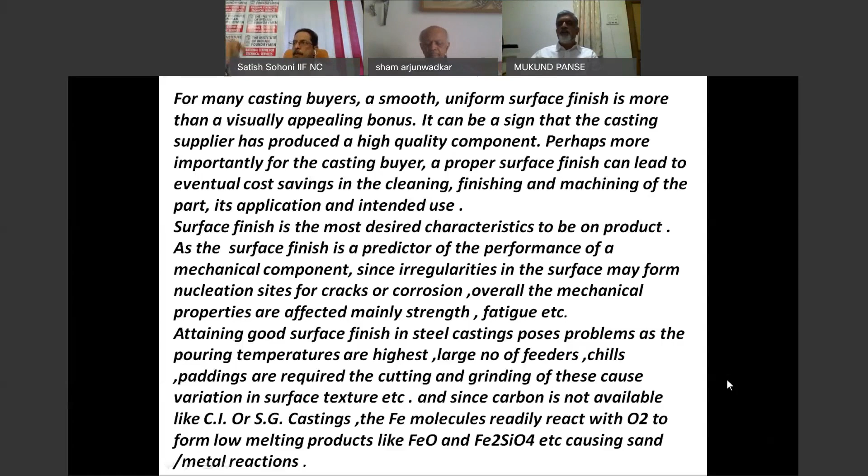It is the most desired characteristic and a predictor of performance - the minor unevenness or surface finish characteristics. The irregularities act as nucleation sites and affect the mechanical properties, especially strength, fatigue, etc. These irregularities also affect the corrosion properties of stainless steel castings.

Attaining good surface finish in steel casting poses problems as the pouring temperatures are very high, the metal is reactive, and since the yield is very low, a large number of feeders, chills, paddings are required, and in removing and finishing them, the original texture of the casting gets distorted.

Also, the typical phenomena of reaction with the mold is caused by the oxidation of the iron particles, which does not happen in CI or SG casting as the carbon content itself is very high, and also the carbon in the sand and painting helps - that's why you get a better finish in SG and CI casting compared to steel castings.

Nowadays, surface finish has become an integral part of the quality specifications. Customers will specify so much RMS value of the texture is required.

It also affects the performance. For example, in pumps and valves, if the inside portion is rough, the velocity of the fluids and the product will get affected. Also, mainly casting forms a small part of a total equipment, and the total equipment is of a different look. You cannot have a bad part in a total equipment which will get highlighted.

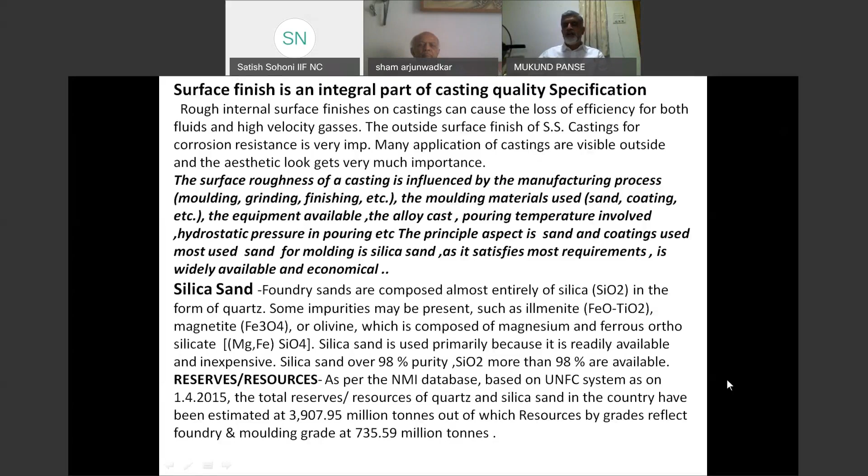And the Allahabad sand, which is on the banks of Ganges, is supposed to be one of the best sands in the world. As per NMI survey in 2015, the total silica sand reserves in the country are 4,000 million tons, out of which around 735 million tons is suitable for foundry use. So sufficient stock of silica sand is available.

Normally, surface finish specifications like ASTM A802 or MSS SP-55 for valves specify various characteristics like surface texture, non-metallic inclusion, gas porosity, fusion, expansion, inserts, metal cutting marks, grinding marks, etc. But we are going to consider this basic surface texture of a casting, as these other defects are things other factors can also contribute to.

For example, gas porosity can come because of the basic gas in the metal itself, gas generated by the molding material, gas picked up during pouring in the running system, etc. So we'll concentrate basically on the basic texture of the casting and how we should get a good texture.

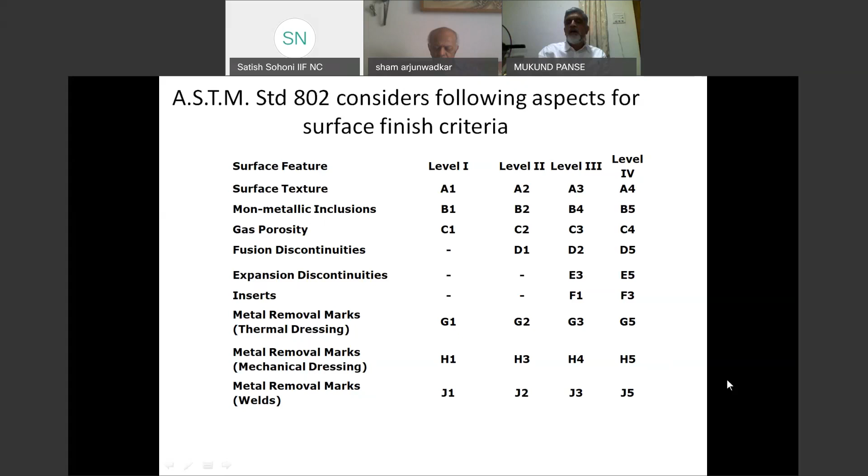The casting texture or surface finish is characterized and classified by RMS values, classified on a standard strata comparator from 20 to over 900. For best sand, that is shell molding or no-bake with very fine sand, you can try for around 150 to 200. For most castings, you will get around 400 to 500. You should try to see that you don't touch 900 or cross it.

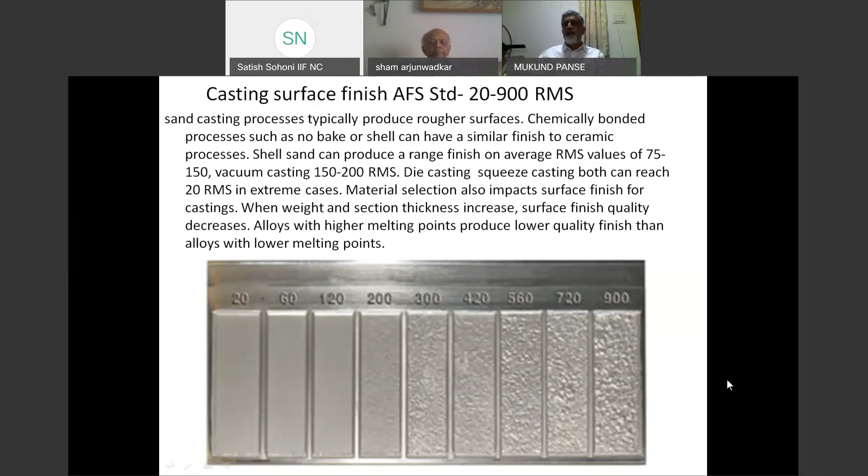The surface finish you get is mainly dependent on the fineness of the sand. The finer the sand, the better texture you will get. However, when pouring heavier castings, the fine sand will get fused and a sand-fused layer will form. So you have to use coarser sand, and the resulting texture, that is RMS value, will be on the higher side. So we'll see what are the basic requirements of sand grains for use as a molding material so that you get a better surface finish.

Naturally, the best characteristic is mechanical stability of the sand. Sand is mined, then transported, then mixed in a muller or mixer, then exerted to certain pressures in making a mold, that is ramming, jolting, squeezing or whatever method you use. Then metal is flowing on it, and then you are knocking out the sand. With all these mechanical forces applied, the basic sand grain should withstand these pressures and not disintegrate. Otherwise, more fines will be formed and the shape will be distorted every time.

The second most important property required is thermal stability. You are pouring steel castings at somewhere around 1500 degrees centigrade, so thermal stability is very important. It should not change its physical and mechanical characteristics when the metal is poured.

The third important characteristic is chemical reactivity. When pouring a metal into a certain type of mold, if the metal is alkaline and the sand is acidic, like pouring manganese steel in a silica lining, the reaction of the metal with the mold is likely to be more excessive and you are likely to get a bad surface. So you should consider the chemical reactivity of the basic sand, considering the temperature of the metal you are pouring and the type of metal, its chemical composition.

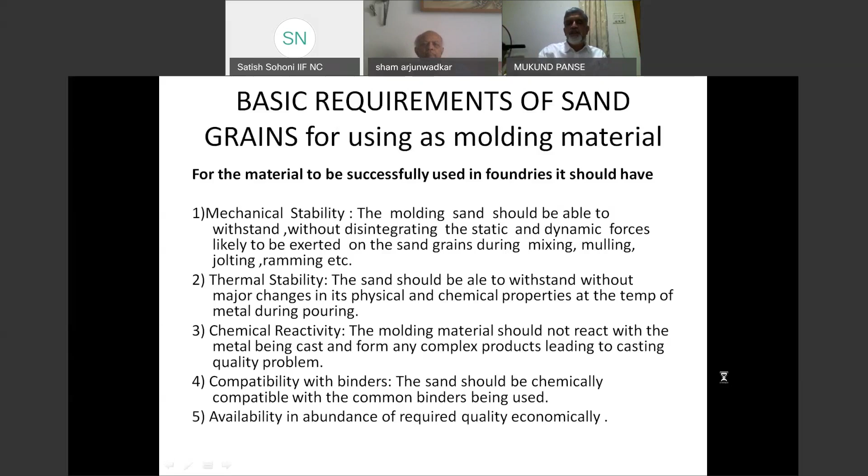So what are the basic characteristics which influence casting quality? It is refractoriness of the sand, that is its fusion point, the temperature it can resist. Linear expansion, the sand grain will expand when the metal is poured, and this expansion of sand can cause certain sand defects of the casting, which we will discuss shortly. The grain size, shape and distribution will decide the texture of the mold and what will be replicated on the casting surface.

The AFS clay content of the sand should be as low as possible. The clay will consume binder but will not contribute to the strength. Also, with more clay content, the sand will be more compact and expansion characteristics will be hampered. And lastly, the acid demand value, which affects use of certain resin binders. So the acid demand value should be checked when certain resins are to be used.

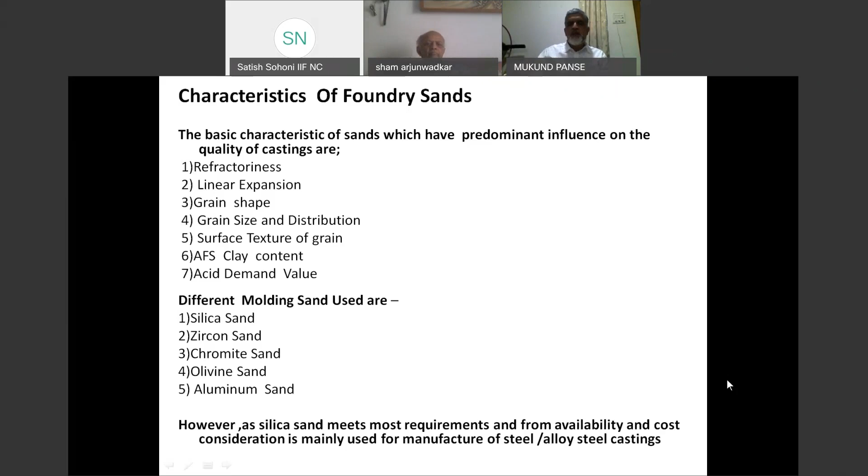The basic major molding materials or molding sands used are silica sand, zircon, chromite, olivine, and alumina. We will see one by one what are the characteristics of all these sands. We just discussed the expansion characteristics. The silica sands satisfy most of the characteristics fairly, except its expansion characteristics.

You have rammed the mold, so the sand grains are compacted. If the individual grain starts expanding, there is no space for the grain to expand. Then what happens is the sand buckles, it cracks. When it buckles and a crack is formed, metal inserts into it and you get a scab. The same cracks, when formed in corners, heavier sections, or inside the core, you get rat tail or veining defects.

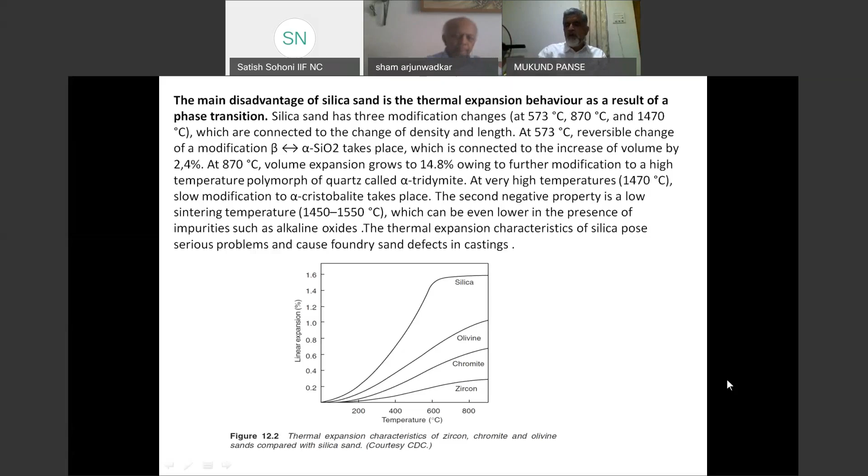These are the defects caused by expansion of the sand, and this is where silica sand is inferior to all other sands. Next sand used is zircon sand.

It is zirconium silicate. It is excellent sand and meets all the requirements. It is neutral, doesn't react with most metals. It has excellent thermal properties, very high fusion point, very low thermal expansion. The sand grains are round in nature. Unfortunately, the cost is very high.

This is a byproduct of heavy metal production, that is atomic energy applications, and hence its application is being steadily discouraged for foundry use. Now it is mainly used only in paints or in some proportion to some very high alloy and intricate investment casting slurries.

However, with zircon sand full molds, it is difficult to make castings because the metal gets chilled and you get a lot of cold shuts. So zircon sand was, or is, being used only for chilling purposes, so that sand doesn't fuse in heavy sections of a steel casting.

Advantage of zircon sand is you can mix it with silica sand, 50% zircon, 50% silica, something like that, to get the effect of both sands. You can reduce the consumption and get some effect of neutral chemical reaction. But again, this use is restricted to heavier junctions only.

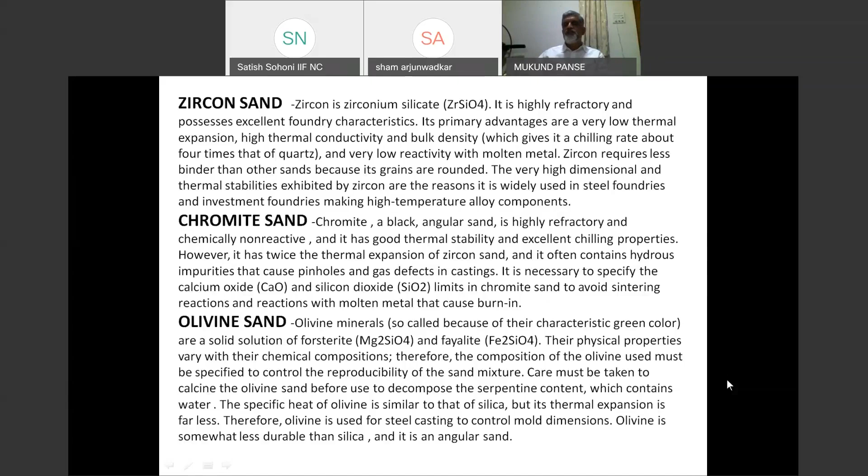Chromite sand is a black angular sand. It is highly refractory, chemically non-reactive, with good thermal stability. Its thermal expansion, though more than zircon, is substantially less. Its chilling properties are very excellent.

But the problem is this is a mined sand, a crushed sand. So you get angular grains, and getting the exact distribution required is difficult.

This chromite sand is again used at heavier metal junctions so that the metal doesn't fuse. You have to control the SiO2 and CaO percentage in this, because when the free SiO2 is more, it can react with chromite and iron when the metal is poured, forming a solid, hard fused mass.

The next sand is olivine sand. This is also a mined sand. It is green in color, hence called olivine. It's magnesium and iron silicate. The physical, mechanical, and chemical characteristics slightly vary depending on the proportions of this. Unfortunately, it is difficult to get exact proportions and exact distribution of sand.

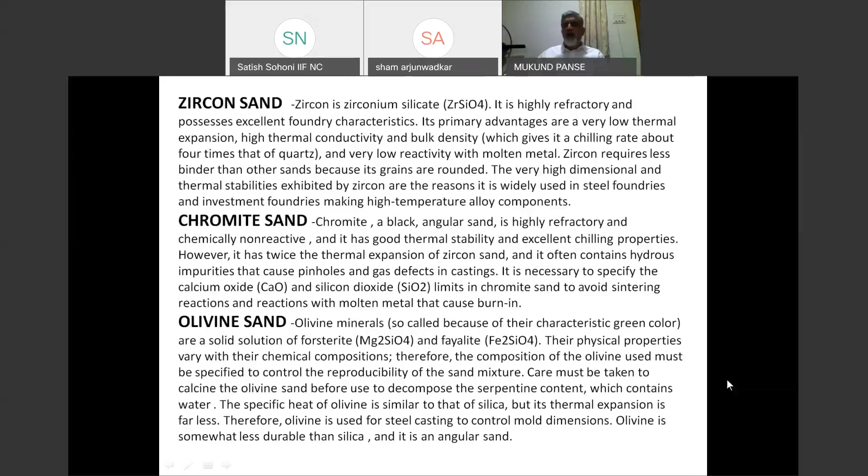It is used mainly for making manganese steel castings, because manganese doesn't react with this Mg and you get a much better surface. However, you have to use it after calcination of this sand, because there is serpentine in this sand, and serpentine, being hygroscopic, absorbs moisture and you can get blowholes in the casting.

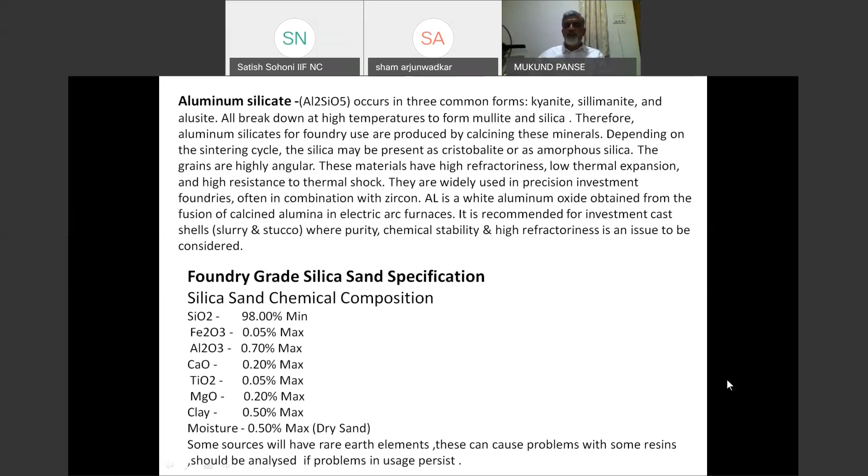The specific chemical specification of silica sand is 98% purity, and mostly you get this purity. However, you should control the TiO2, CaO in this, and also the clay percent and moisture.

This is the specification of chromite sand. The chromite content is around 45 to 50%. Iron is very high. You have to control the SiO2 percent. The specification mentions less than 1%, which is difficult to get. But if it goes more than 3 to 4%, you will probably end up with problems.

So you should check that, and also check the distribution, as you may not get the exact distribution you want. This is mostly imported sand, but still used in heavier sections in steel casting for chilling where fusion of sand is expected. However, if this is used in high proportion and reclaimed sand is used for facing, this can create issues again of reaction between chromite and silica.

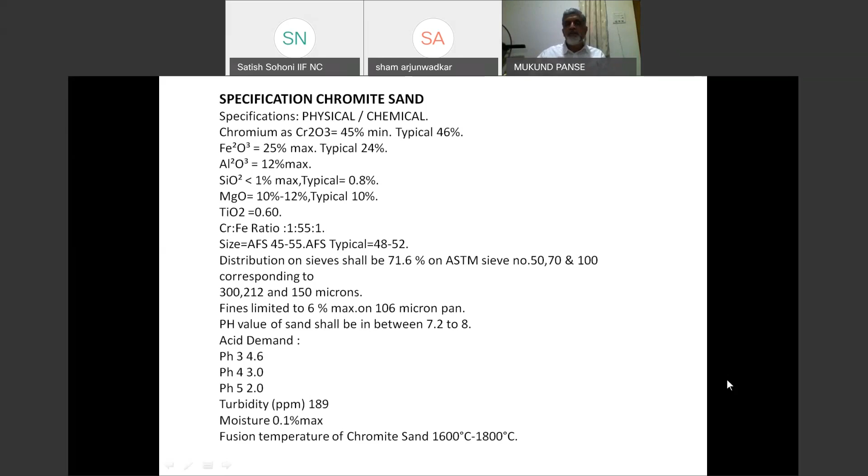This is a photograph of chromite sand used and fused at a heavier junction because of reaction with silica and iron. This is called double skin defect or elephant skin defect, and it can then be removed only by chipping. Even by grinding it is difficult because it is a hard refractory mass and doesn't get ground. Fettling becomes a major issue if this sand layer is formed.

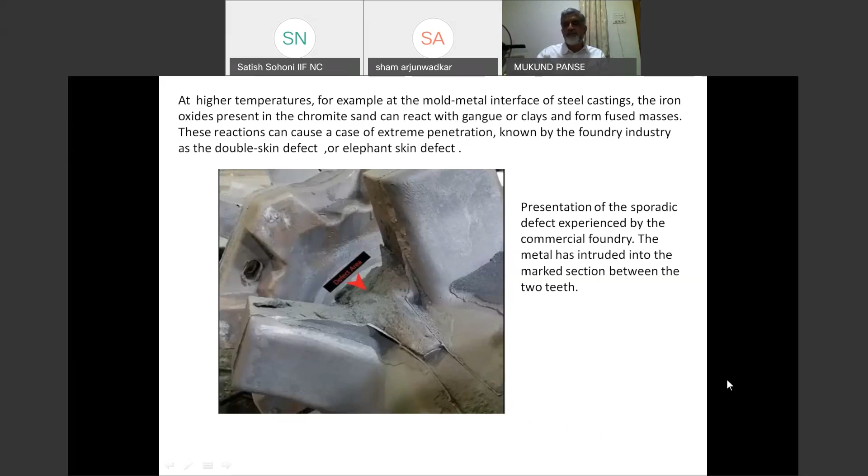Another use of olivine sand is in Hadfield steel.

You should check the chemical composition, and if FeO content and CaO content are higher, you should check on it. MgO content as given in the specification is 50%. You should try and see that it is more than 50%.

It has high alkali content and it doesn't go well with certain resins. You have to choose the resin sand mixture carefully if you are using it properly.

It is only used mainly in manganese steel because silica sand grains react with manganese steel and you get a very bad surface. The grains of this are angular.

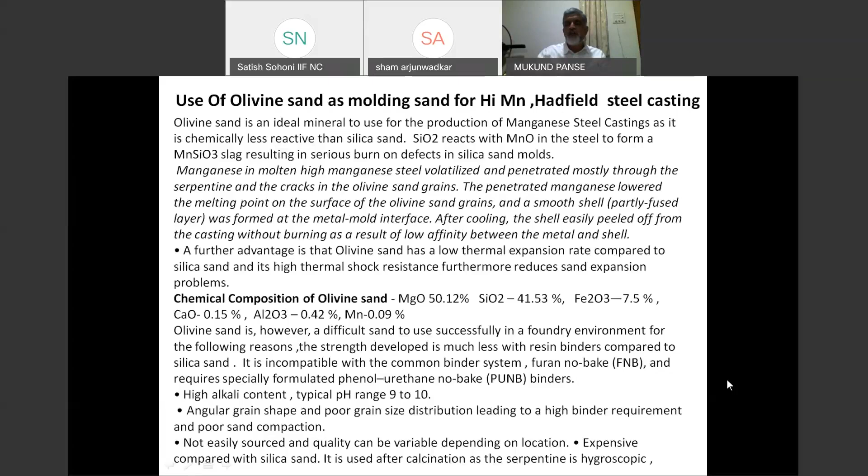It is expensive and not available at all locations in India. The transportation cost adds to it. This is also used after calcination, as you want to remove the serpentine portion, which is hygroscopic.

This is comparative of molding sands. AFS grain size is normally what you get. With silica, you can get whatever grain size distribution AFS number you want.

Zircon you get much finer. Chromite and olivine also, but with chromite and olivine it is difficult to get the 3 or 4 sieve distribution which you normally seek to have proper compaction of the sand grains.

The thermal expansion of silica sand is more than 4 times that of zircon, and 3 times that of chromite, and again the silica sand expansion is non-linear.

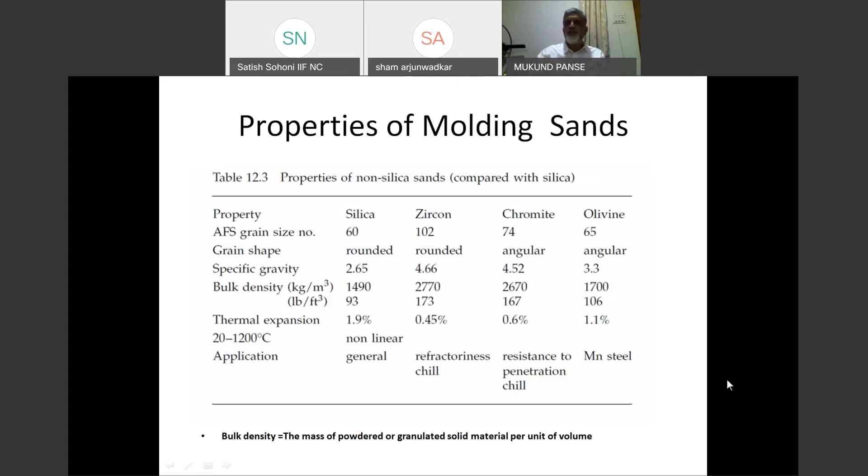The refractoriness is also less, but around 1400-1500, with application of paint, silica satisfies most of the requirements of sand and can be used effectively.

The basic grain structure shape contributes a lot to the properties of molding sand. You seek a rounded grain, so the binder required is less, because the surface to volume ratio of a sphere is less compared to all other shapes.

However, it is difficult to get exact spherical grains. In practice, what you can get is subangular, rounded, and of medium sphericity.

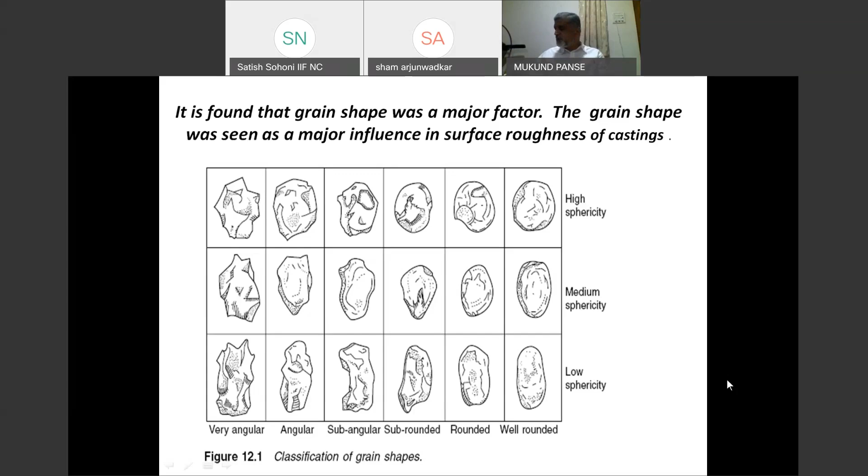As the sand surface area increases, I mean if you don't have rounded grains, the bonding material required increases. The rounded grains also have better flowability and better permeability.

The porosity of the mold controls the permeability. When the grains are compacted, rounded grains will leave certain voids, provided you have proper distribution of sand.

You try and procure sand with 3 or 4 sieve distribution at 80%, so that there are not too many fines, and the gap between the two grains is not filled by the fines. This way you get good permeability.

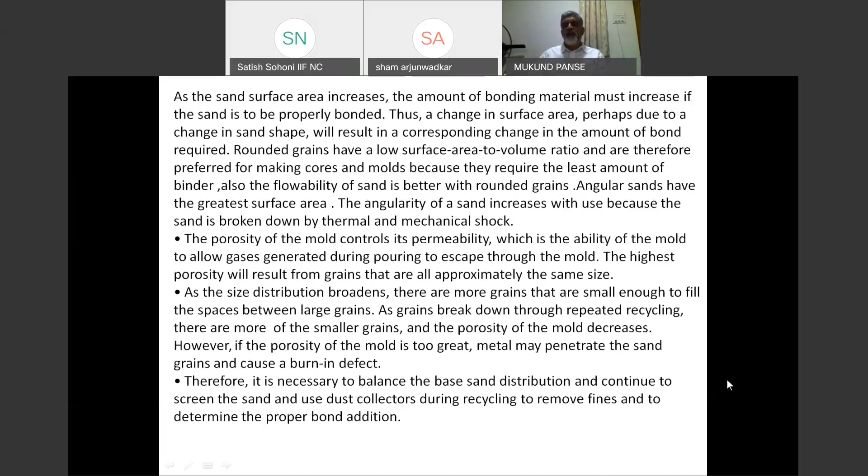This size distribution is designated by AFS number, which is a weighted average of different grains, and the specification of sand you can have, say you want 50, 60 AFS, or 70 AFS which is much finer, or 45 AFS which is coarser.

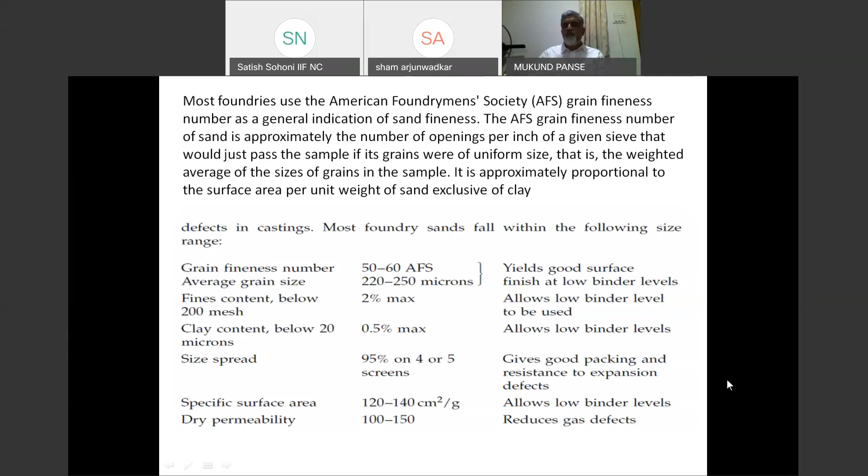The clay content or fines are normally quoted as 0.5 or 1%, which you get in washed sands, and the spread you mentioned, 3 sieve distribution, is 70 to 80%. From the sand grains you make a sand mixture with which you make a mold.

The grains are mixed with ingredients, binders, so that they can be bound together when rammed, compacted or heated, and the formed mold should retain its shape. From a general viewpoint, the sand should be readily moldable and should not produce defective castings if used properly.

Certain specific properties have been identified: green, dry, hot compression and retained strength of a sand mixture. Green strength is the strength of a mixture in the green stage, and this is applicable mainly to green sand.

Dry strength is the strength after the mold has been dried. Hot compression strength is the hot strength of a mixture.

This is required to be high so that the sand doesn't get eroded when the metal is flowing through it, and it retains its shape.

Retained strength is the strength of the sand after the metal has been poured and while it is cooling. The retained strength should be as low as possible so that the casting cools and contracts without any hindrance, and you don't get hot tears and cracks.

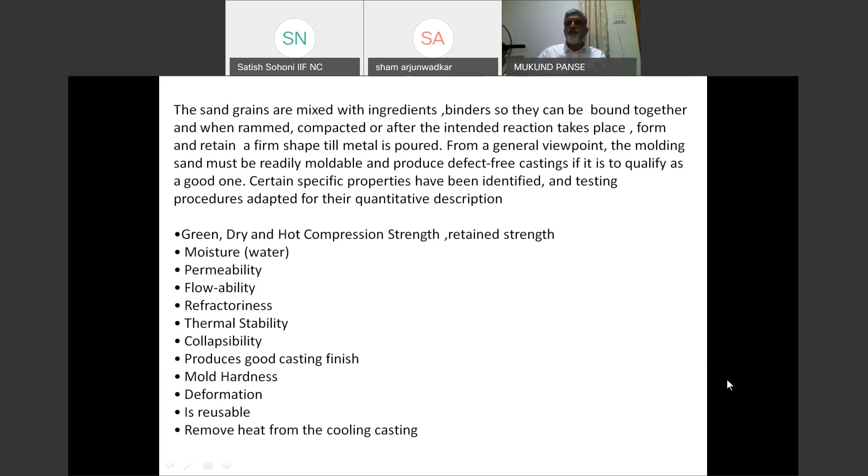So what are the different sand mixes we use? Green sand is the basic, age-old technique where bentonite clay is mixed with the sand along with some water.

The clay develops a layer on the grain. The grains, when rammed, are formed together and some strength is developed, though the strength is very low. This is a very fast process of molding. Since no gassing is required like the CO2 process, and there's no waiting for self-hardening, it is the cheapest process. It is most convenient for machine molding applications like jolting, squeezing, ramming, or Herman machines, sand slingers, or turntables, because it is very fast. You can ram the sand and the mold can be stripped. The mold is ready.

Dry sand was used earlier, in which the same sand, a small amount of core oil, fire clay, and iron oxide was used, but probably nobody is using it now because no-bake and CO2 sands have become quite common. But green sand has its own advantages. Its collapsibility is very good and it's still used by many foundries, especially where machine molding is used or for very small castings without very stringent requirements. It can be comfortably painted with spray painting, and you get a fairly good surface finish as well.

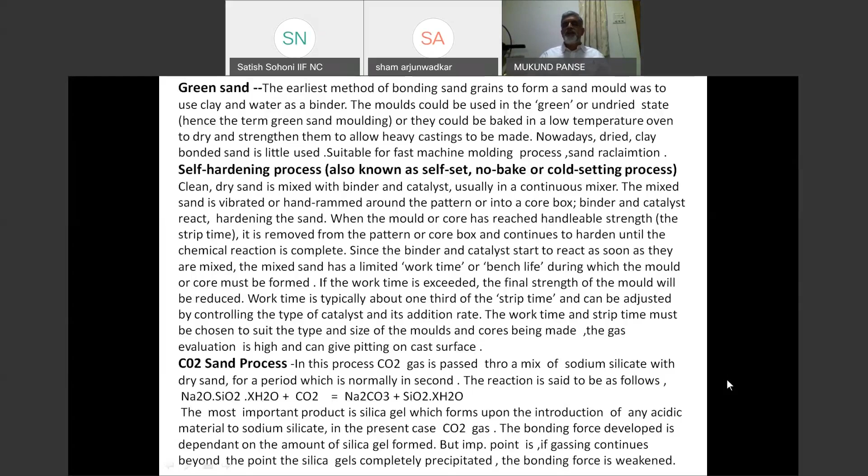However, reclamation of CO2 sand is very difficult. CO2 sand can be completely reclaimed only by a wet process, that is washing of the sand, which is now practically impossible given the quantity of water required.

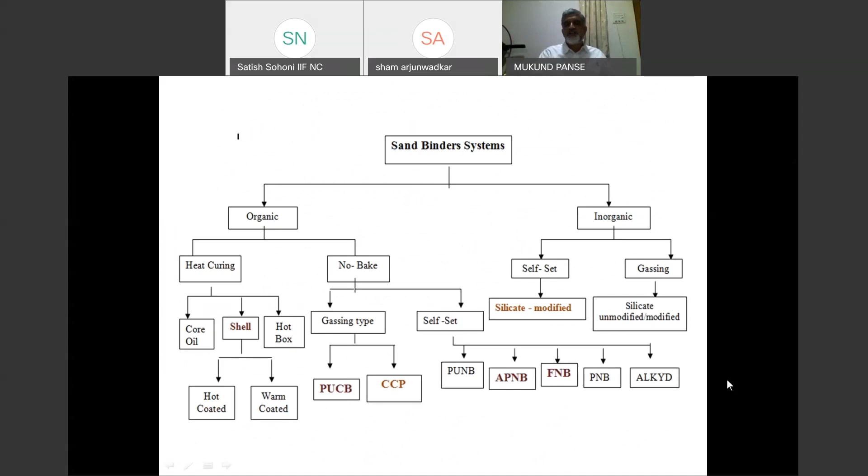For the surface finish, the basic problem starts when the metal is poured in the mold. What will happen in the normal course? Normally, when the metal is poured in, it should take the shape of the sand grains. So if the sand grains are very fine, you should get a fine texture. If the sand grains are coarse, you should get a slightly coarse texture, and it should stop there. But two things happen when the metal is poured in the mold.

When the metal is poured, with the hydrostatic pressure, or because of the high fluidity at these temperatures, it goes into the pores between the two sand grains. The sand grain between the metal gets fused because at that temperature it doesn't retain its thermal characteristics, and you get a fused layer of sand on the surface.

To avoid this, you try to have a coating of refractory material which will close the pores. The refractory material has substantially higher refractoriness, it is less reactive with the metal, and you get a better surface finish. This is the basic requirement of a coating: it should be a barrier between the metal and mold, with better thermal characteristics, high refractoriness, non-reactiveness, and very small size, so that you get a good surface finish.

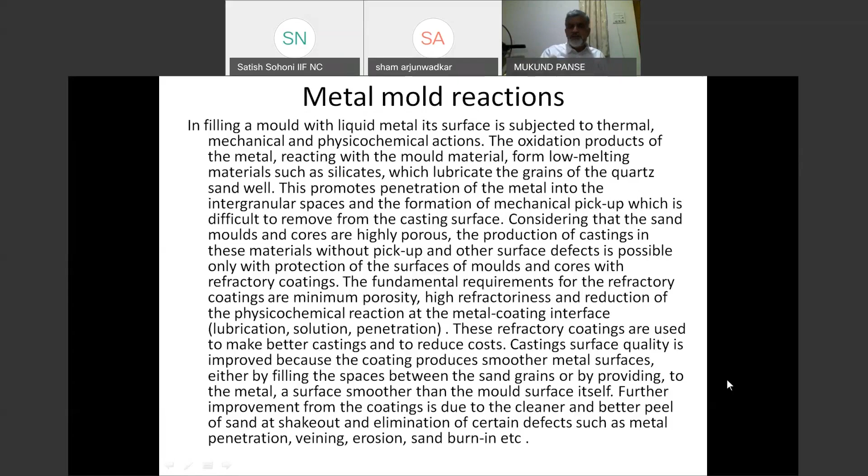Penetration happens mechanically, but there is also a chemical reaction which takes place, which is more dangerous, and this is the major cause of bad surface finish in steel casting. When the steel is poured in a mold, in the process it gets oxidized and FeO is formed.

You have deoxidized and taken all the care, but when the metal is poured into the ladle, it gets exposed to the air. Again, when it is transported and poured in the mold, it is again exposed to the air, and FeO is formed. This FeO has a much lower melting point, and at the melting temperature of the metal, its fluidity is very high. So it starts reacting with the silica and forms Fe2SiO4, which again has a very low melting point.

This doesn't happen in cast iron because the carbon in cast iron itself is high. The FeO basically doesn't get formed.

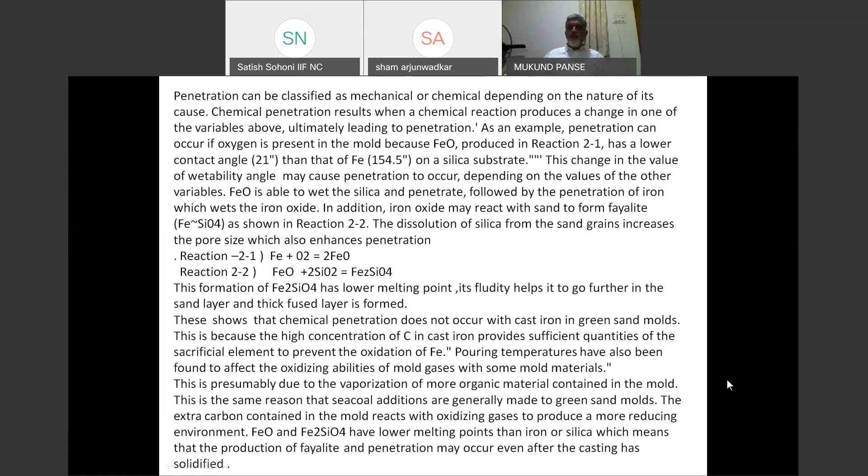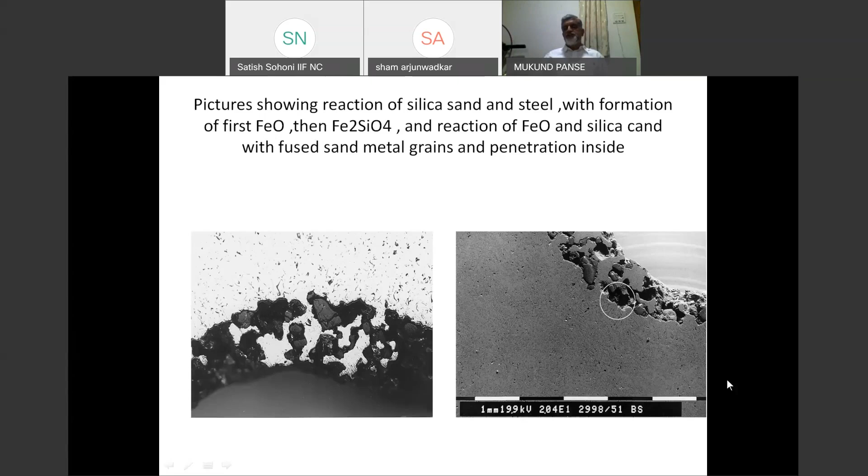Now, when FeO comes in contact with the sand layer, it starts reacting. It first goes between the two sand grains because its fluidity is good. Apart from its fluidity, it reacts with the sand grain and forms Fe2SiO4. These reaction products still have much lower melting point, and at this temperature their fluidity is substantially high. The penetration rate is very high, and you get a very thick fused layer of sand.

This penetration causes the wettability, that is the ability of the metal, since FeO and Fe2SiO4 form, to be substantially higher. Let's see what wettability is.

If you drop water on glass and drop oil on glass, you can see the contact made by oil versus the contact made by water. Compare it with a steel ball kept on glass - the steel ball will have minimum contact, oil will have more than that, and water will have much more. Now imagine a drop of water on chalk or sand - it will get spread immediately. This is what wettability is, and it relates to the surface tension of a liquid when it comes in contact with a solid layer.

The wettability angle, theta, is defined, and this wettability angle for FeO is much less - it is 21 degrees - while the wettability angle of iron is substantially more.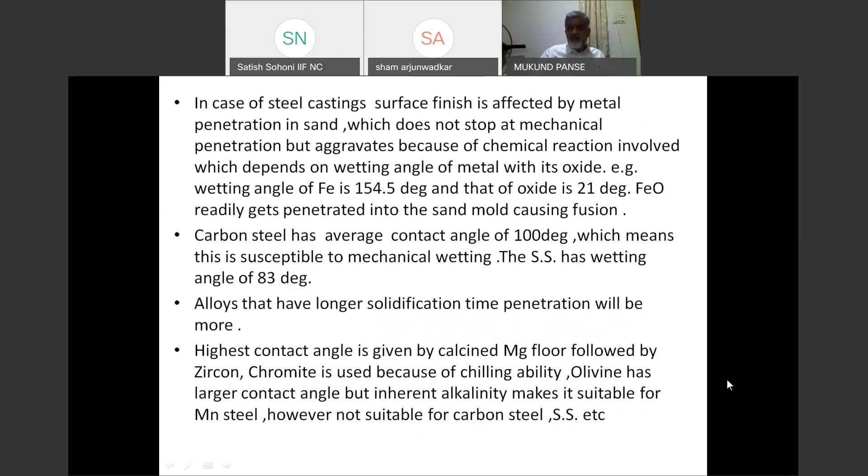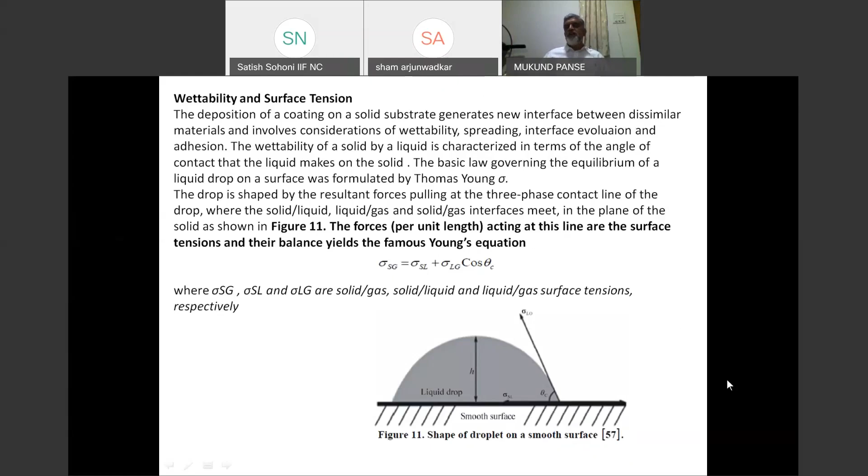This is the reason you have to choose a proper layer of refractory, so that the iron oxide doesn't form easily, doesn't spread very easily, and the reaction doesn't proceed very fast. These reactions, and whether it behaves like water or oil in terms of theta angle, are all dependent on the basic characteristics of the chemical reaction between metal and mold. This chemical reaction is basically responsible for completely wetting the mold sand grains with the oxides, which causes sand fusion.

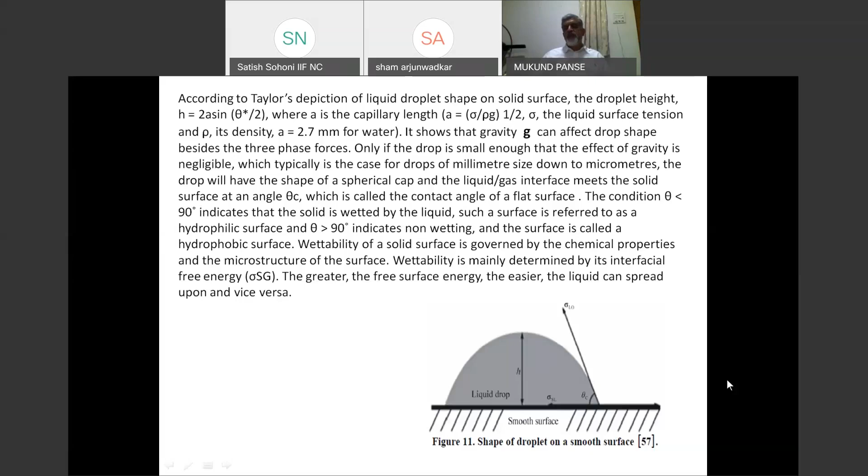At the same time, when coating is to be applied on the mold, we want the wetting angle of the coating to be excessively low so that the spread of the coating is very good. The importance of foundry coating in improving surface quality cannot be overemphasized. It depends basically on the characteristics of the paint, and one has to choose the proper coating material. So what are the important characteristics of the coating material? We'll see.

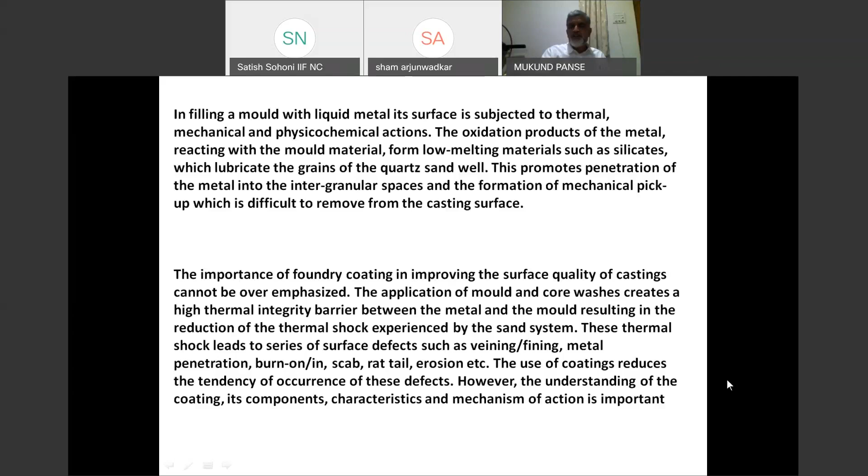A refractory coating should have a high fusion point. We are trying to give a coating of refractory fines on the mold surface, but dry refractory cannot be coated, so it has to be carried through some liquid so it can be sprayed or coated properly. Normally, the carriers are either water or alcohol, spirit based.

When you are trying to carry it and the refractory is coated, it should remain there and should not be friable and come out. So you need a binding agent to keep the grains bound together. Also, when applying the paint, the refractory should remain in suspension, so you need a suspension agent. So these are the four ingredients you need in a coating.

The coating should be correctly applied on a sand wall. The refractory material should have high fusion point, low expansion, be chemically inert to the metal, have sufficient refractory properties to cope with the metal being poured, and good adhesion to the substrate. The coating should get adhered, it should not spill out, spit, or form cracks or blisters.

It should dry fast. Blistering, cracking and scaling should not happen. The mixture should have good suspension. The core or mold strength should not degrade. The metal penetration should stop.

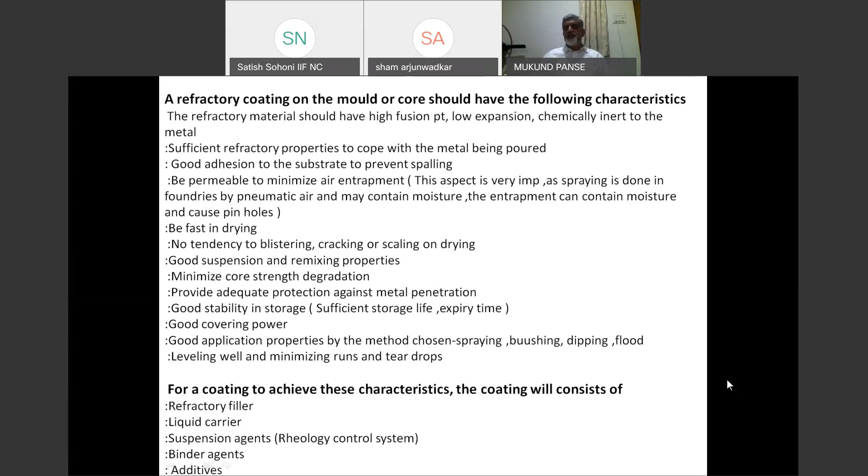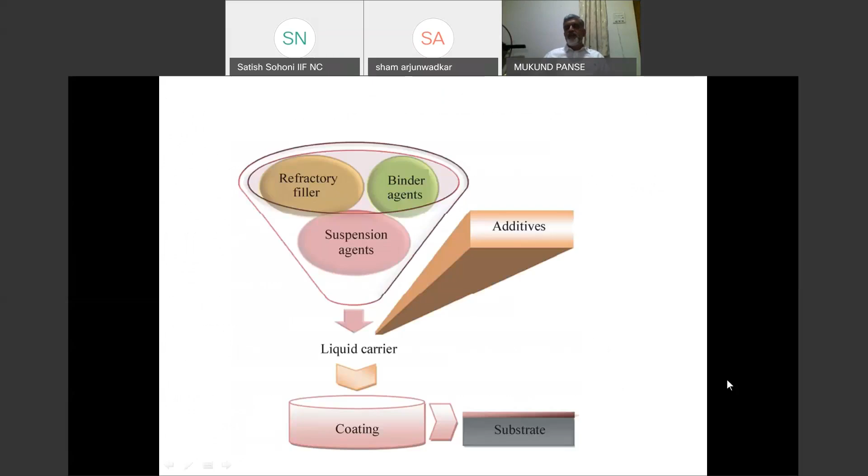For all these, the basic agents are, as discussed, refractory filler, liquid carrier, suspension agent, binding agent, and certain additional additives are required so that the spread of the metal, or scaling, cracking, blistering properties are adjusted. So basically, refractory filler, binder and suspension agent are added to the liquid carrier, and additives are added, and the coating is ready to be applied to the substrate, that is sand or core mold.

The refractory material is the base of a coating, which determines how efficient the coating is. Normally, in a refractory coating, the refractory particles constitute 50 to 70%. Its particle size, shape, density, sintering point, thermal properties, chemical properties, expansion characteristic, reactivity, etc. are all considered for deciding the exact appropriate coating for a proper application.

The application may depend on the metal you are pouring, the size of the casting, the surface finish requirement, etc. The different refractory materials used are plumbago, silica, graphite, coke, anthracite, zircon, magnesite, olivine, clays, chrome, alumina, mica, etc.

The refractory choice considers the type of metal poured, pouring temperature, and the thickness of the casting. The heavier casting will need better refractoriness because the sand is going to be heated for a longer time. Peel characteristic: the coat should not peel off, it should remain stuck on the sand or core. Thermal conductivity, expansion characteristics, application characteristics, toxicity.

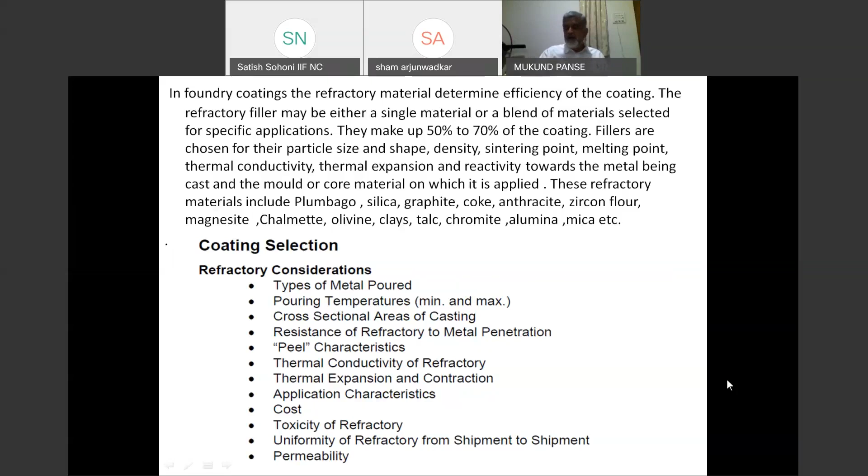While coating, sometimes there are bad odors or fumes coming from the alcohol, so a proper carrier should be chosen. It should get applied uniformly. In shipment, it should not settle down, its bench life should be good, and permeability of the coating should be considered.

We'll consider what are the different refractory materials normally used in steel casting. The best is zircon flour. It has the best of characteristics. As discussed, it has good refractoriness, excellent fusion point, very high conductivity, very low expansion. Everything good is there except cost naturally.

The zircon has 64% ZrO2 and 32-35% SiO2. You should check the content of TiO2, and the moisture in it should be controlled. Its specific gravity, pH values, fusion point, all are good. This is the best coating material available.

Now this is used in mixture with some other refractory materials.

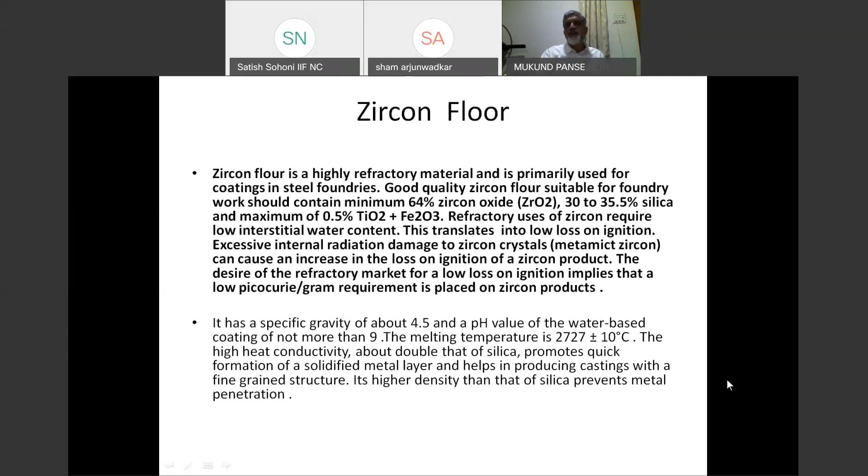Second is olivine. We have seen that olivine has low chemical reactivity with manganese steel, and this is mainly used for manganese steel and some other heavy applications.

Again, the chemical composition is to be checked properly. Its thermal expansion is slightly lower than silica, but it is not as good as zircon. Fusion point is high, 1800, more than silica but lower than zircon. But this paint is used for manganese steel.

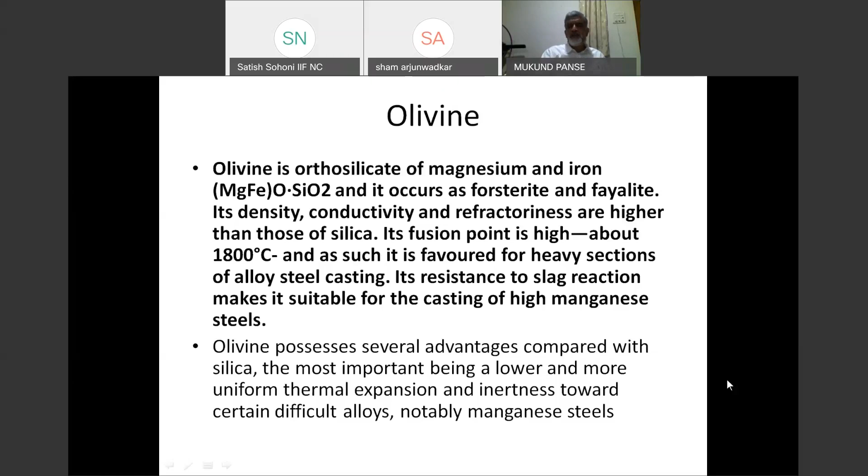This is the comparative data of refractory materials used for painting applications: chamotte, chromite, magnesite, chrome magnesite - availability, refractoriness. You will find that mostly magnesite and zircon only are used.

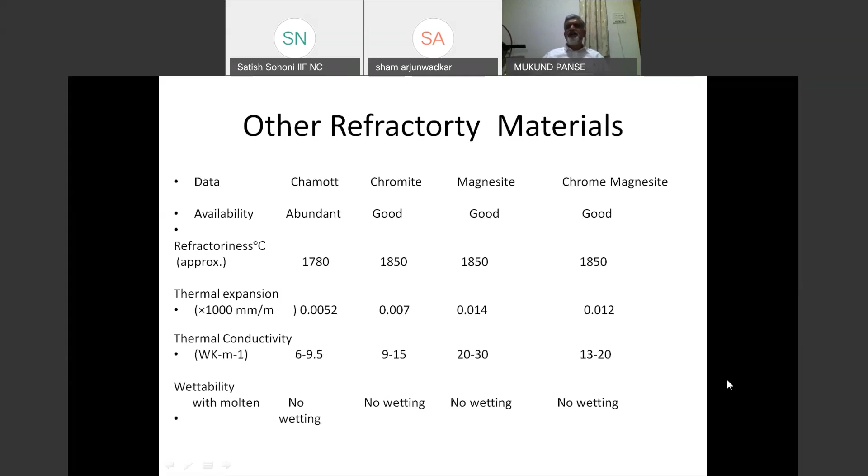The next ingredient of a coating is the carrier, that is either water or alcohol used. Water is non-inflammable, non-toxic, naturally cheapest, and use of water-based coatings is highly recommended, but naturally cannot be used on all types of sand. But whenever possible, you should try and use water-based coatings.

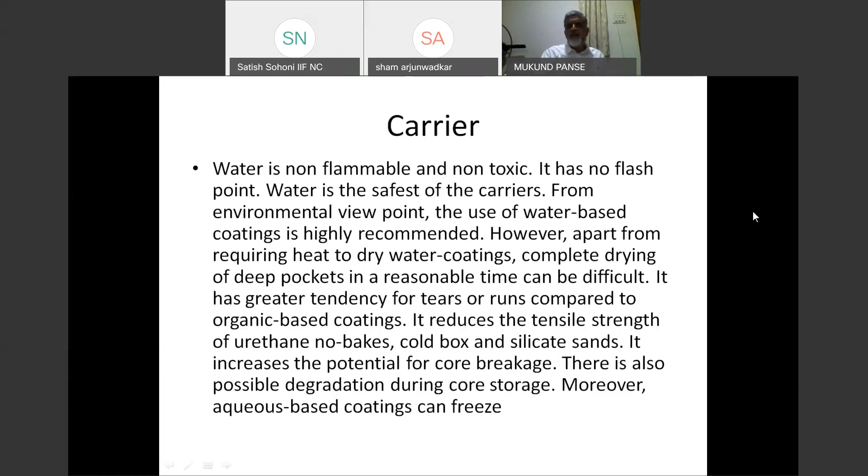The only disadvantage is naturally it cannot be used on all sand, and it has got more chance of dripping and runs forming. Also at very low temperatures, not experienced in most parts of India, but at sub-zero temperature, these coatings can freeze. Next is organic carriers.

These are mainly isopropanols, that is alcohol based. The coating has to be dried by igniting or heating. The typical organic solvent carriers also include methanol, ethanol, hydrocarbon, chlorinated hydrocarbon, etc. They dry very fast. Isopropanol is recommended for use on large molds and cores.

The basic requirement is when you are using an alcohol-based agent, it should burn with a slow heat. The heat generated should not be very high, so that the basic sand binders do not burn away. Also, if it is air dryable, it is better.

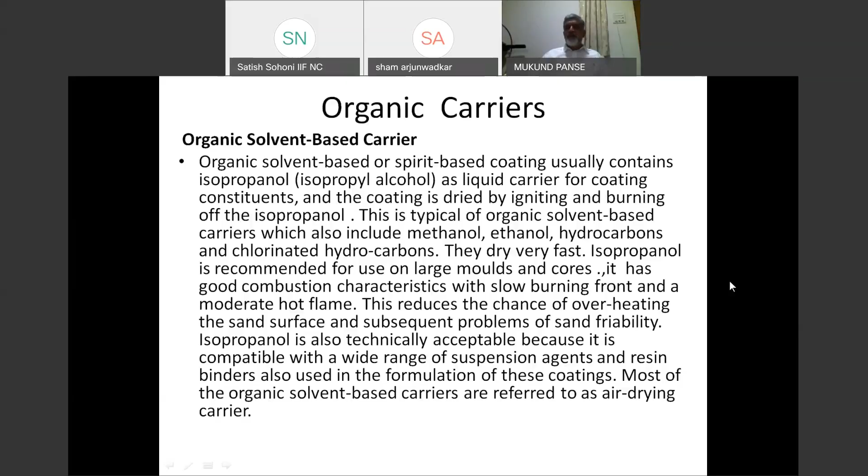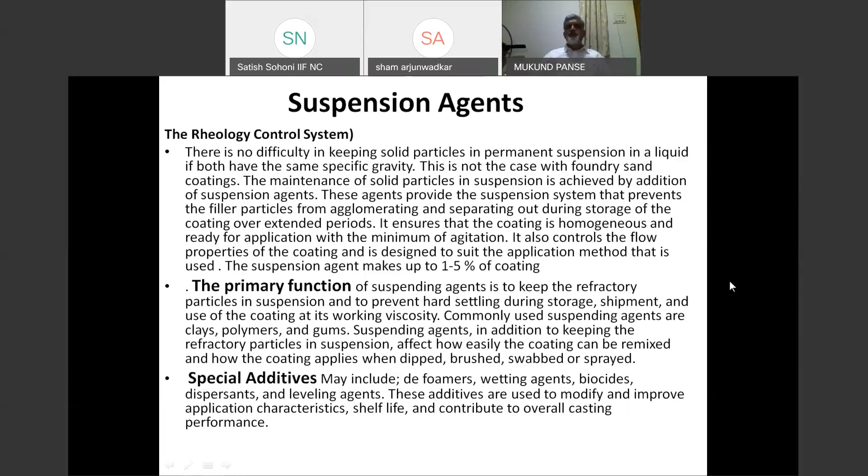Suspension agents: you are having a refractory which is a very heavy material carried in water or alcohol. So it is most likely that when you are trying to apply it, it will settle down, and the viscosity or Baume of the paint will not be constant. So to keep them in suspension all the time, suspension agents are required so that gravity doesn't try to settle the heavier particles.

The agent provides a suspension system so the filler particles avoid agglomerating and separating out during stationary storage of the coating over an extended period. They are required normally 1 to 5%. As we have said, 50 to 70% is refractory only, 1 to 5% is suspension agent, and the balance is mainly the carrier. The suspension agent should ensure that a homogeneous coat is available most of the time with minor stirring.

The primary function is it should not allow the coating to settle in storage, and should not form a hard layer at the bottom. That is, the shelf life of the paint when kept in a container should be fairly good. Otherwise, a very hard layer will be formed, and then it will not get mixed with the thinner or alcohol properly. Also, it should be possible to easily apply the coat by brushing, swabbing, or spraying.

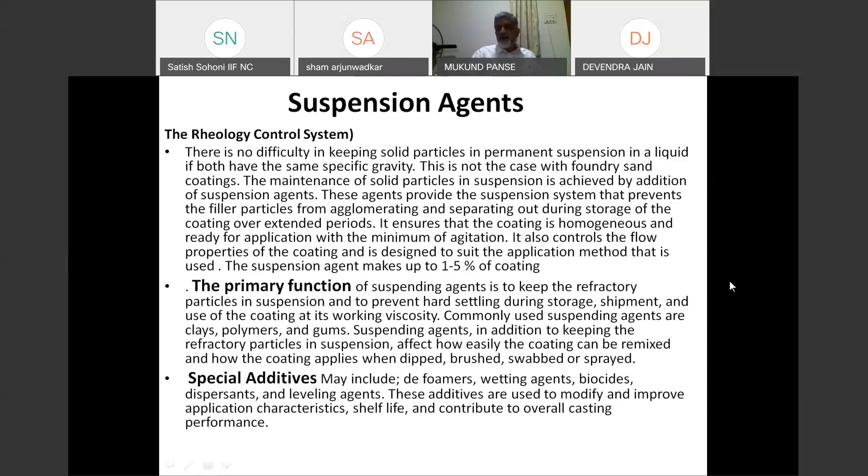Special additives may include defoamers, so that foaming should not occur, wetting agents, biocides, dispersants, and leveling agents. The application of the actual paint needs this wetting and leveling agent so that you get a uniform coat of the required thickness easily, all over the mold, to get a better finish of the casting.

The second ingredient is the binding agent. You are trying to coat the refractory on the mold. After coating through a carrier, it should remain there bonded together and should not come out, meaning it should not be friable such that it gets washed away with the metal.

For water suspension, the binding agents are sulfite lye, dextrin, bentonite, kaolin clays, or certain water-soluble resins. For spirit-based suspension, natural and synthetic resins, phenol, urea formaldehyde, novolac, and other wood resins are used. Binding agents act to hold refractory particles together and attach them to the sand surface.

The quantity of binder is again 1 to 5%. It is important to determine the minimum quantity of the agent required. If it is high, the coat will crack. If it is low, it will get washed away.

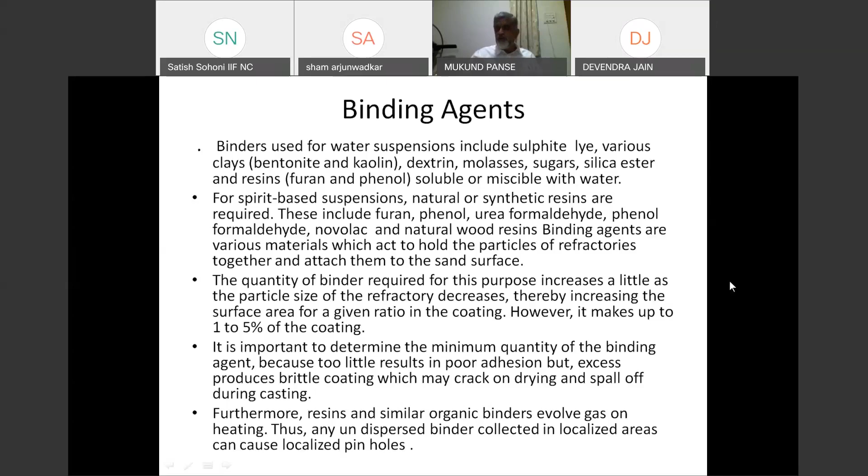So for the mold sand system you are using, you have to settle on a proper mold coating which gives a uniform coating. You may have to carry out certain trials with different paints, but settle on a paint which gives you an exact uniform coat all over the mold. Furthermore, the binder itself should not evolve much gas when heated, because they are resin based.

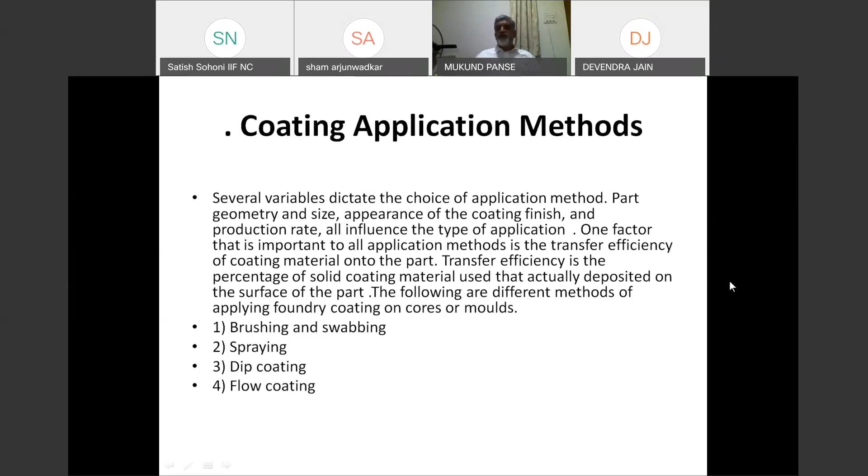Now the coating is to be applied on the mold, and there are various ways a coating can be applied: brushing or swabbing, spraying, dip coating, or flow coating. We'll see one by one what are the advantages and disadvantages of the different coating methods.

Brushing or swabbing is a method of applying coating used in foundries. You have to just brush the paint, ensuring it remains properly stirred with the refractory in suspension condition, because for a bigger mold to brush, it will take a lot of time.

The advantage is that force is applied while brushing. There is certain force applied, sufficient to force the small refractory particles to go into the pores between the sand grains.

The method gives uneven thickness, and stripes of brush or swab are visible on the casting surface, especially in walls and other castings where aesthetic values are important, and they don't allow these brush stripes or brush marks. So many times after one brush coating, you have to give a fine spray coating so that the brush marks are not seen.

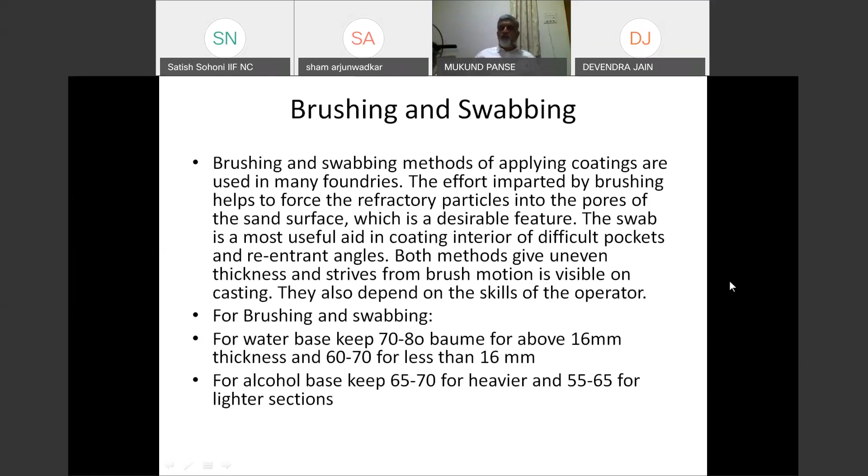You can use 70, 75, or up to 80 Baume for water base and 60, 70 Baume for alcohol base. This Baume can be changed for thicker or smaller castings depending on what surface finish is expected.

The next method of applying coating is spraying. Spraying is a much faster method of application used in foundries. The care you have to take is to get uniform air pressure so that the coat is uniform. You also need to ensure that the air is completely moisture free. The permeability of the coat should be good enough so that air entrapment does not occur.

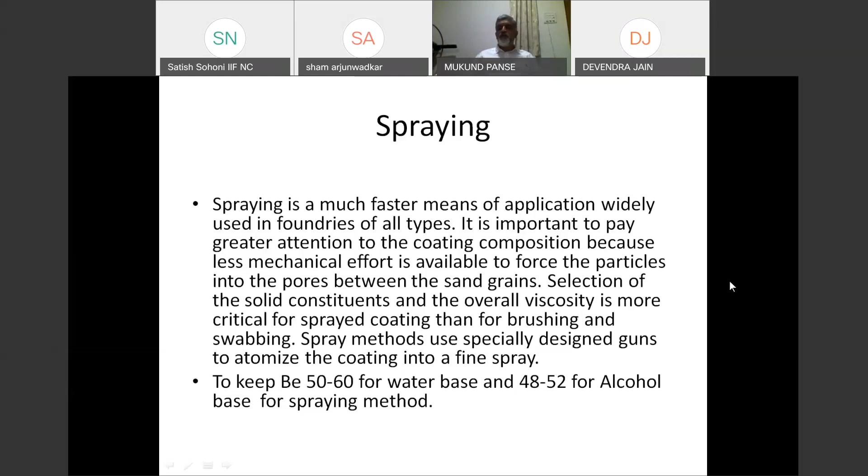The viscosity used for spraying is slightly lower than for brushing. For water-based paint it is around 50-60, slightly lower for alcohol-based. Spraying is problematic where intricate shapes are present; you have to use different angle spray guns for those portions, or brush those areas. The nozzle size through which paint is sprayed should be checked intermittently to get proper thickness of the coat.

Green sand molds are difficult to brush because the sand grain strength is not high, and while brushing the sand grains will loosen. Also it may not become uniform, so spraying is preferred. Water-based paint cannot probably be used on green sand because the moisture will increase, and it is very difficult to...

torch and burn off only the excessive moisture. Green sand should mostly use spray painting of alcohol-based paint, and that paint should be ignited, taking care that it doesn't accumulate at the bottom portion. If excessive paint is not there, it will not form gases, and there is good adhesion to the mold surface.

After spraying, the coating could get ignited or naturally dried. Natural drying is difficult because you will have to give a lot of time. You should ensure there is no peeling, cracking or blistering of the coating. You have to settle on whatever system of sand and coat you are using, trying different coats.

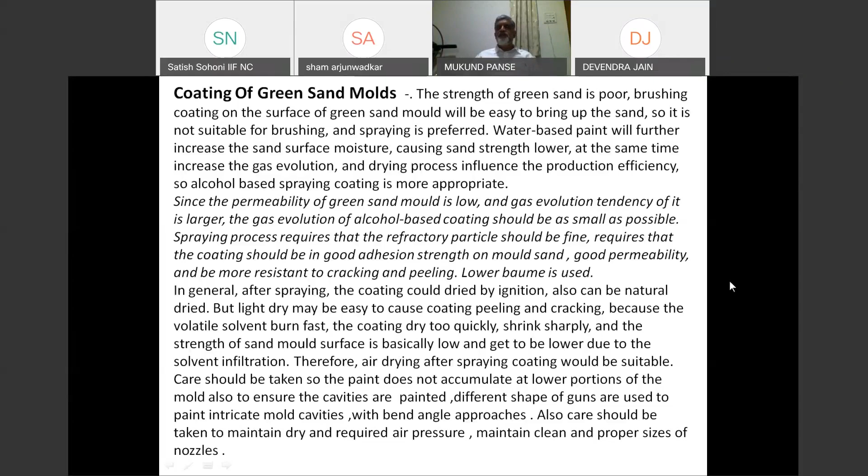Whichever basically gives you a uniform, good coating and good surface, you should continue to use that. There are many variables and you have to choose properly between them. The strength of the surface area in green sand or other molds is slightly improved after the coat is ignited and the hard layer is formed, and it should form in a reasonable time.

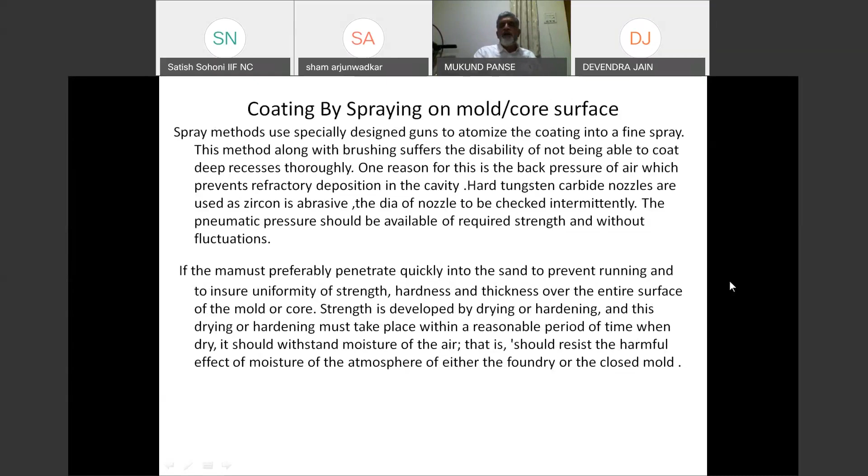The third process is dip coating, mainly used for cores, especially when the cores are small and large production runs are involved, so you can standardize the coating thickness. If you dip and withdraw it fast, there is insufficient time for the paint to drop back into the tank, and the thickness will be more.

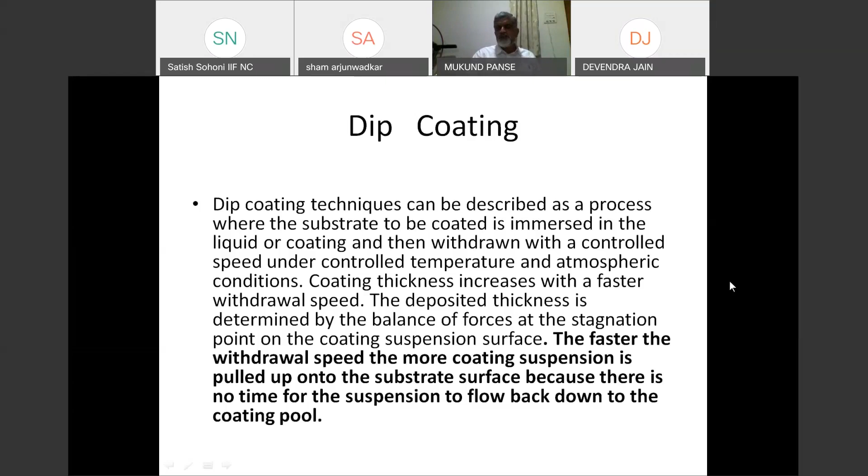At faster withdrawal speed, more coating suspension is pulled onto the substrate because there is no time for the suspension to flow back. You should standardize the timing; if it is completely mechanized, it is better. This can be done only where large runs of cores and molds are used.

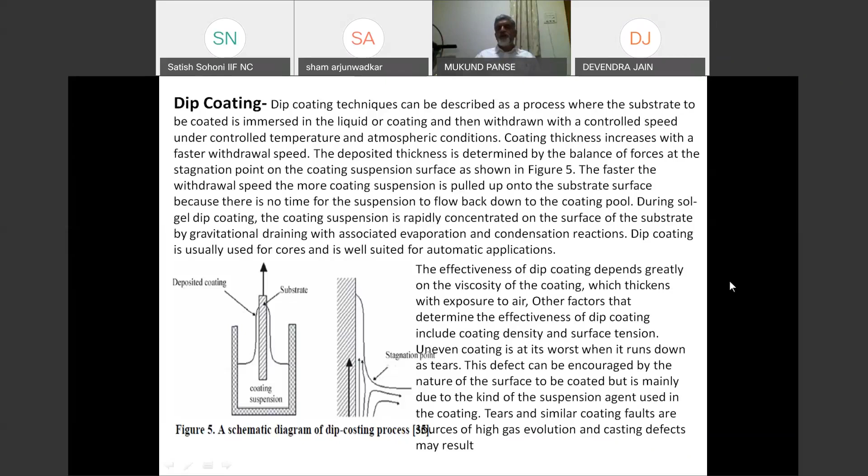You should also ensure the viscosity of the paint is maintained in the tank, and that fungus or other contamination does not form, because many times people just keep adding paint when the level drops. You should keep a proper place to keep the core after draining, and ensure there are no drippings or runs.

While dip coating, we have to ensure a uniform layer is applied with optimum coating thickness, depending on your requirement, the metal being poured, and the thickness of metal around the core or mold. There should be no moisture left, good suspension in the tank, good resistance to bacteria formation, satisfactory bond strength, and suitable rheology and application characteristics. Rheology relates to suspension and application behavior.

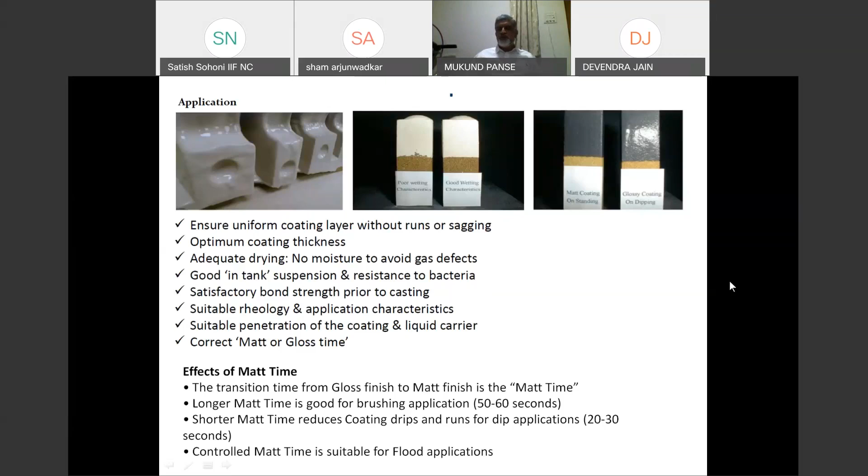When you coat or dip the paint, you first get a glossy surface, and after the paint is either slightly absorbed into the coating or drops off, you get a matte finish. What you are aiming for is a matte finish, not a glossy surface, because a glossy, thick coat is likely to peel off. The time from glossy to matte is called matte time. Longer matte time is good for brushing applications, while shorter matte time is good for dip coating, to avoid runs.

The last process is flooding. In flooding, a normal garden hose without pressure, or a normal hydraulic pump, is used for very heavy and odd-shaped molds. You need a mechanical arrangement to hold the mold tilted, and another to collect the paint that drips into a tank, which is then filtered and reused.

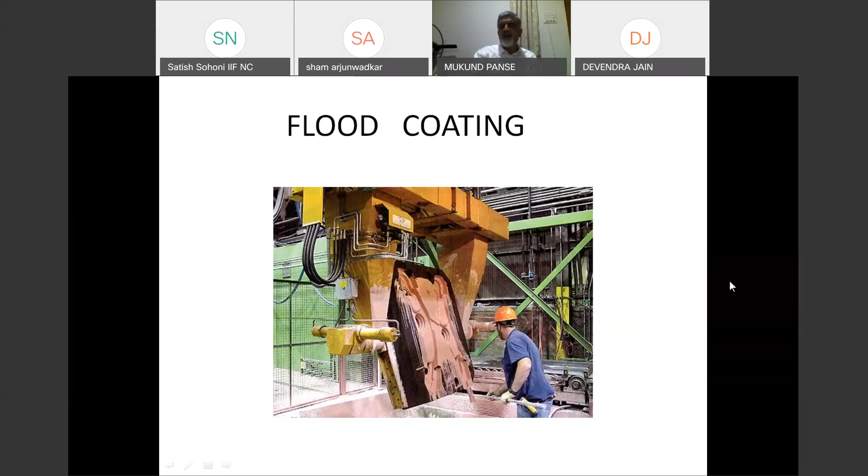Flooding is mainly suitable for water-based paints on no-bake large molds. It can also be used for cores, but it's better if the cores are on a turntable that moves continuously, so the coating doesn't spread improperly and there are no runs or drippings. The mold should be tilted at 30 to 40 degrees so it drops properly, giving a thick, uniform, water-based coating substantially faster.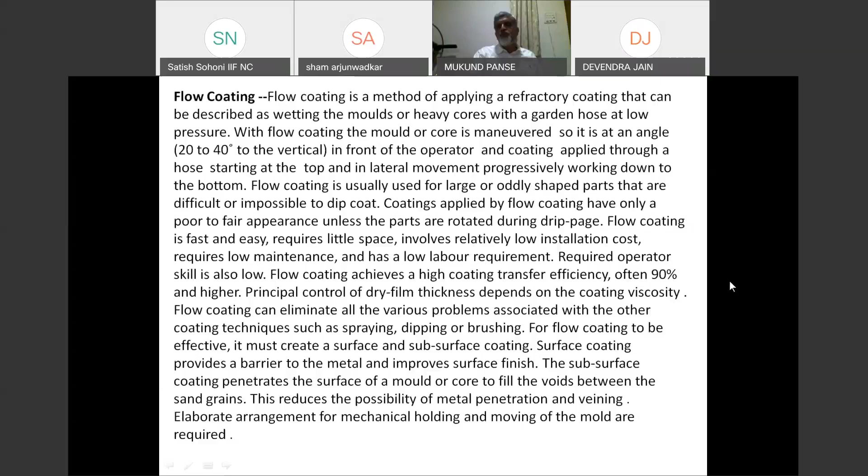If you have a big mold, painting by brush will take a very large time. Also consider transfer efficiency - if there is a certain quantity of refractory in the coating, check how much actually goes into the mold or core coat. With flow coating, it is maximum because it is very fast and you can have whatever thickness of coating, unlike spraying or dipping. The process has to be standardized, but it's mainly used for very heavy molds, normally not for smaller molds.

After the coating is applied, the question comes for drying. The coat should be dried properly, with the suspension agent completely removed. The substance does penetrate the mold and core material, but you must ensure it doesn't affect the original strength of the core and mold - it shouldn't become friable, and gas formation or slag entrapment shouldn't happen. The organic based carriers get slightly heated and burned properly.

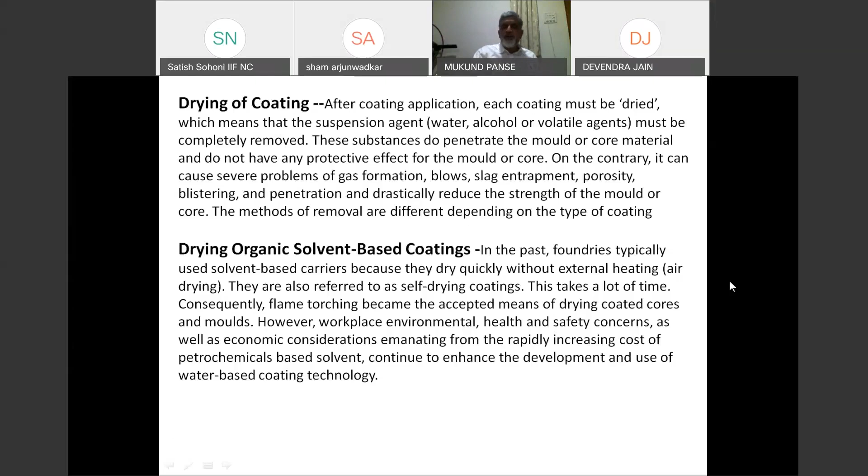The problem mainly comes with water-based paint coating. For drying water-based paint, you can use ovens. Normally, a hood or bogie is kept where molds are made, and molds travel through it - so it is continuous, or left overnight for large molds. Still, it may not get completely dry, so you have to use microwave or drying tunnels or high intensity lights.

Torching should be judiciously used. In torching, the heat is manually controlled and may be applied very high. Apart from drying the coating, it may burn the resin or binder of the sand and make it friable.

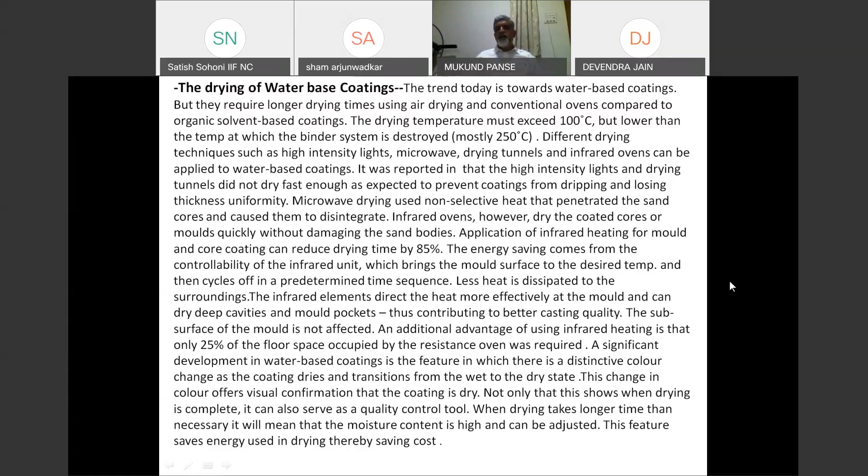So drying should be done at a predetermined time, whether on an oven or floor. The important characteristics of a coating are specific gravity, which is basically the refractory content in the paint - the higher the refractory content, the higher the specific gravity will be. It can be measured, but it's not very easy to measure.

Penetration depth refers to how deep the paint has penetrated the core or mold surface when applied. You can't say more or less is better - it should be the required depth to give a better surface finish. For a higher thickness of metal, you should have better penetration; for a smaller mold, you can have a smaller metal thickness.

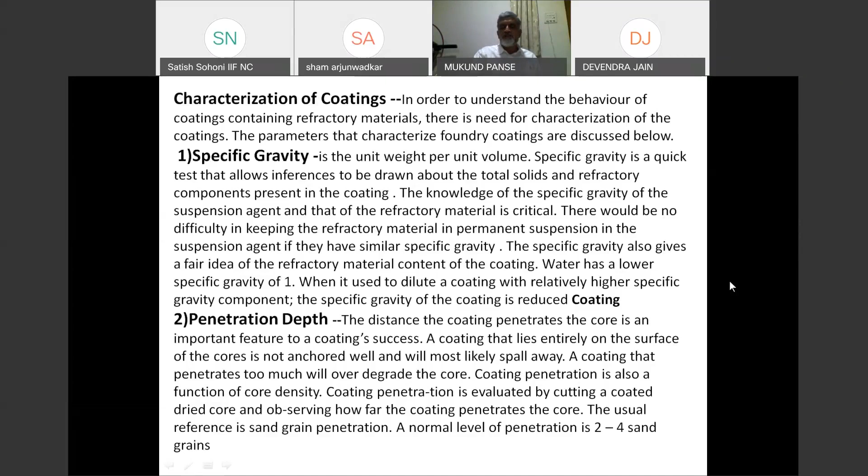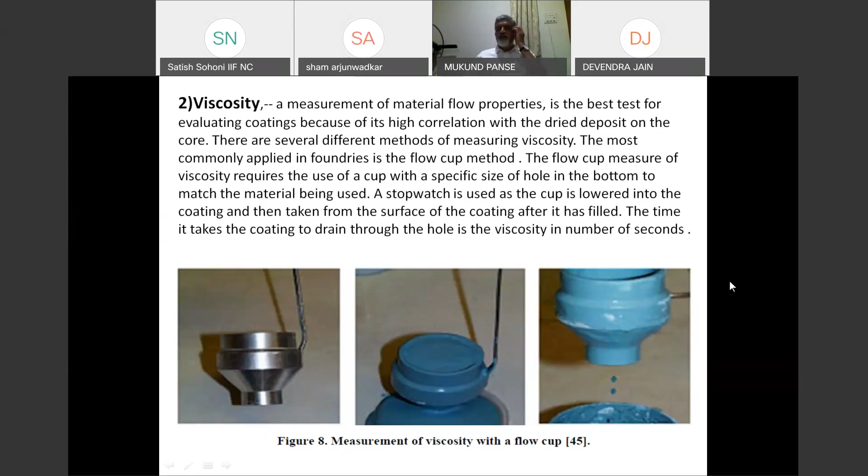Viscosity is measured by flowing paint through a standard cup. Paint is taken in the cup and allowed to flow through it, with a stopwatch used to time how long it takes for the paint to completely run out. It's an arbitrary number, but whatever paint you standardize on, you have to intermittently check and ensure the viscosity is properly maintained so you get the required thickness of coat.

Another practical test is Baume, using a glass tube with a bulb at the bottom filled with lead balls, which suspends in a liquid. Depending on the viscosity of the liquid, it dips in, and the mark on the Baume indicates the reading - water-based paint can be 70 Baume and alcohol-based paint 65 Baume for brush painting. This Baume number comes from a standard Baume meter: when immersed in a liquid, at whatever level it settles, that marking on the tube should read 65 or 70.

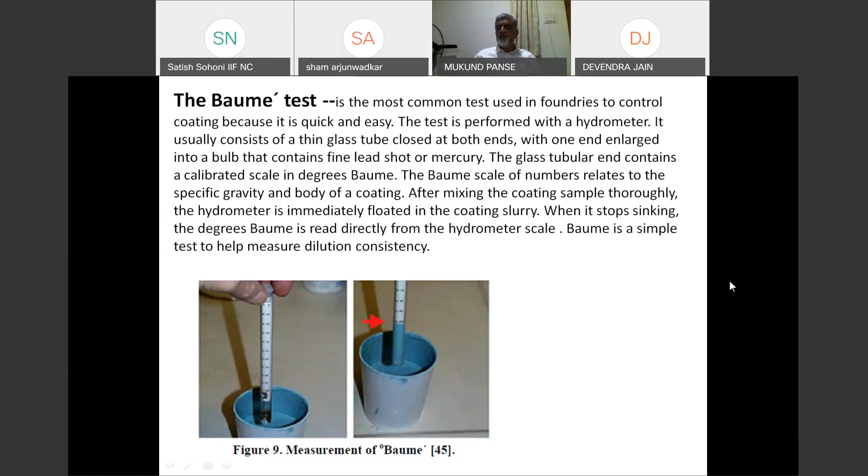For checking thickness of the paint after application, there is a standard gauge for this. It's difficult to check paint thickness after it is dried, so wet paint is checked with this gauge, which has depth markings at various levels to measure how deep the paint is - standardized for your application per ASTM standard. As a thumb rule, the dry coating thickness is half the wet coat.

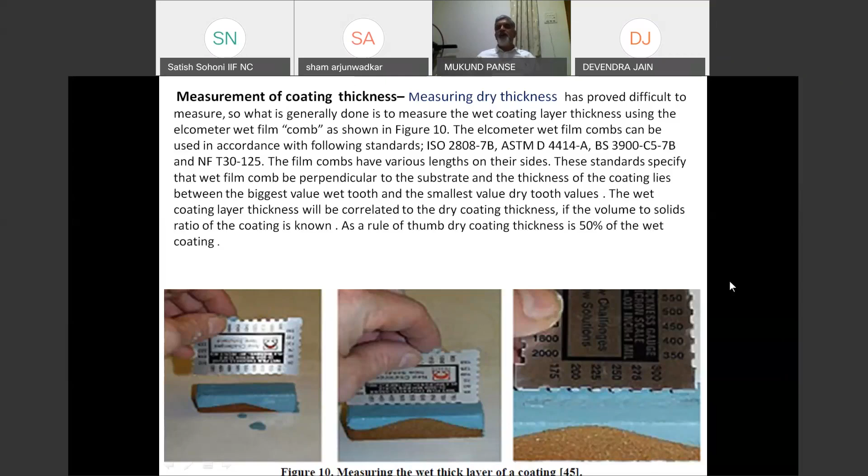Coating permeability is important for two reasons: when spraying, some air gets entrapped and it should be able to escape, and when the film is dried, the gases generated should also be able to escape. The permeability of the coating is measured using a permeameter.

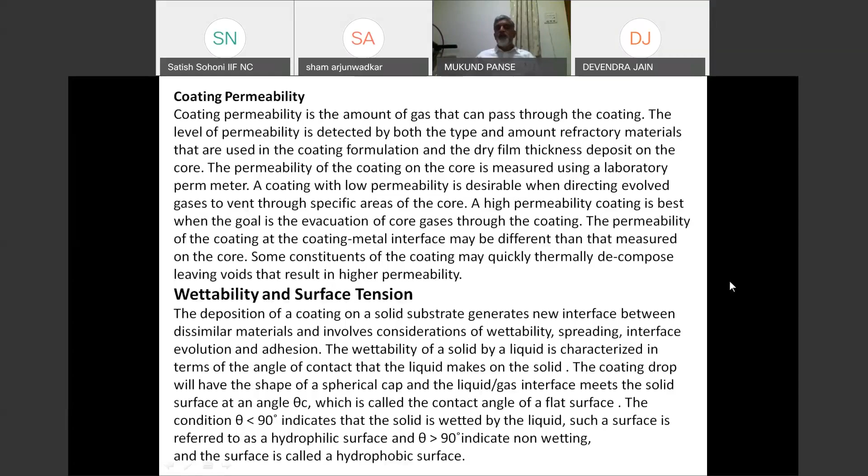Wettability and surface tension: as we discussed earlier comparing a steel ball, oil drop or water drop, the wettability of the coating should be as high and as good, so that it spreads very fast and you can give a uniform coating to the mold and core very easily.

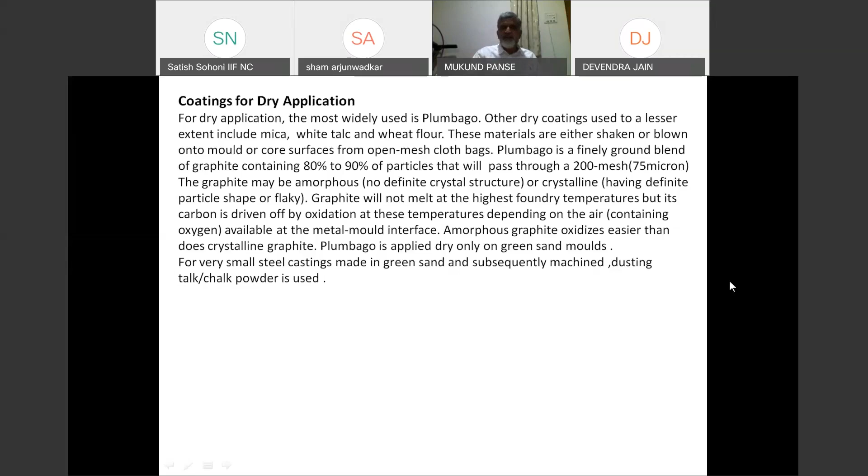Dry coatings are normally not applied in steel casting, but for very small castings you can use them. Some people use chalk stick, mica, or some powders like quartzite powder, kept in a cloth, and the coating is given on the mold. Normally it's used for cast iron smaller castings, where graphite, amorphous carbon, or crystalline graphite plumbago is kept in a cloth and spread. It is normally not used on steel castings.

Full mold casting, or quite a few large one-time-requirement castings, are nowadays made with the full mold process. The coating requirements are somewhat different, but much more important in this case.

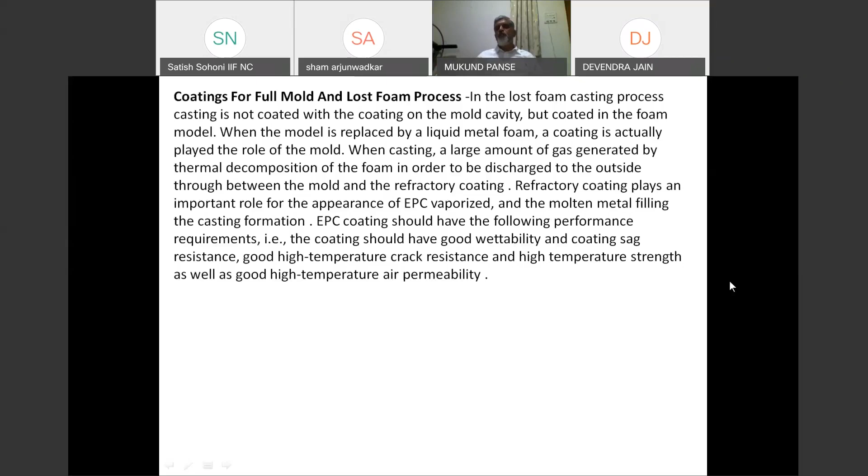When you are pouring in lost foam process, the foam pattern is coated first, not the mold. It is coated with one or two coats, dried completely outside in sun ray or using infrared rays. It is then molded, and when you are pouring, substantial gas is formed as the foam burns. The gas formed by the foam should pass through this coat -- there is no other way for the gas to go.

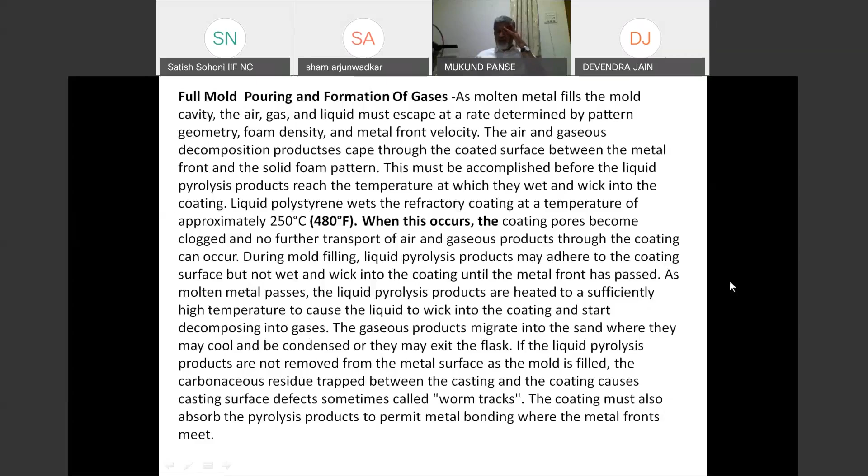When the gas forms at lower temperature through the coating, lustrous carbon is not formed as a liquid film, so you don't get liquid carbon on the casting surface, which would give a bad surface in full mold casting. These specialized coatings are developed by various people, mainly Foseco and others. You have to avoid the liquid pyrolysis product, a carbon film or tar, from accumulating. For this, the gas formed should pass through as fast as possible -- that's why the permeability of this coat becomes very important.

This is to get the basic surface finish of the casting. The surface finish also depends on your finishing operation -- the way you are cutting, grinding, finishing, shot blasting, etc. You have to ensure that cutting marks from electrode cutting or gas cutting are not deep. You should grind the riser or runner portion properly, and if there is an upgradation, that portion should also be ground smooth so the surface is acceptable.

But whenever you grind these portions of risers, pads, or upgradation, the natural texture of the sand on the casting gets disturbed, which many people object to when they are specifically looking for aesthetic view. To some extent, not 100%, this can be corrected by excessive shot blasting using specific hard balls of bigger size, so some amount of natural texturing is restored.

There are many different applications nowadays apart from normal casting. For castings which are subsequently machined, surface finish doesn't matter as much since the surface is going to be machined anyway. But where it is not going to be machined and is used directly, and seen by people, the aesthetic value comes into the picture. That's why it's more important in pumps and valves, because they form part of a bigger equipment where other parts are finished better.

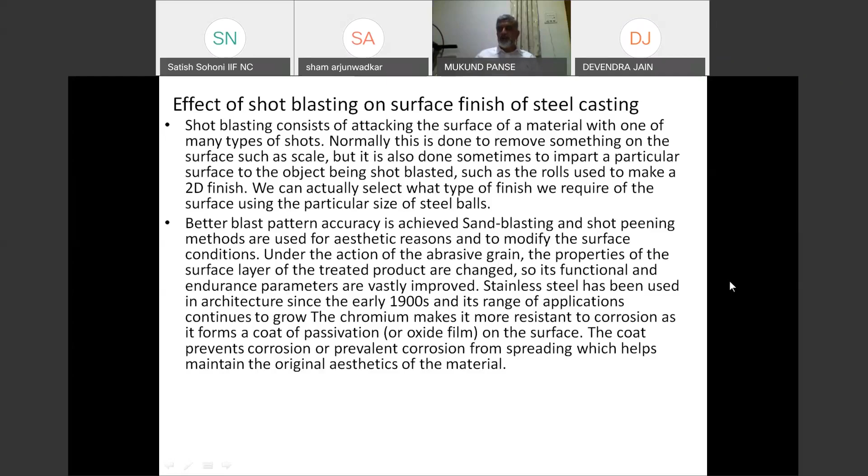I can give an example -- we recently completed a big steel casting order for Andaman Nicobar Airport. This came from a design decided by the architect, who chose to use casting in a certain application. The rest is all pipes or steel, giving a uniform surface on the pipes and other structure. He wants that same uniformity on the casting, which is very difficult to achieve. But there is a lot of application in this case where it becomes important to get this finish -- that's the importance of sand and coatings.

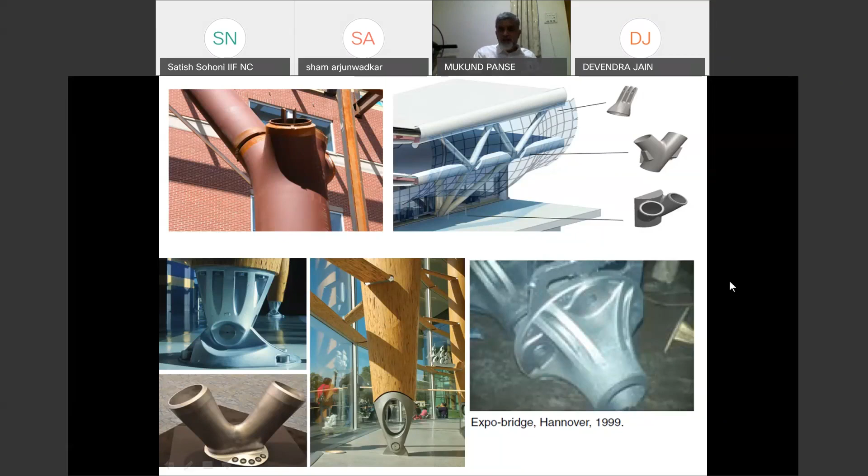Mr. Arun Ranganathan is asking: zircon flour used for coating -- what mesh size is suitable for that?

Normally minus 200, minus 270 mesh is used, but these are proprietary to the paint manufacturer, so normally we don't need to get into all this. We have to decide - you try some paint, and if it gives good performance, stick to it. Keep checking the properties like body or viscosity, or whatever properties you can check comfortably.

One more question is about collapsible agents - what kind should be used and what is the recommended percentage in CO2 sand? Normally 0.5% Dexil is used. They are starch dextrin based. You can use plain dextrin at 0.5 to 1%, depending on what collapsibility you want. Normally 0.5% dextrin is used.

Dexil is the proprietary name from Foseco. I shouldn't really use proprietary names, but these are popular ones, and equivalent grades exist from all manufacturers. Normally 0.5% is used. You can use wood flour also - it's very cheap. Wood flour burns and creates some voids, but gas evolution should be controlled since it evolves some gases.